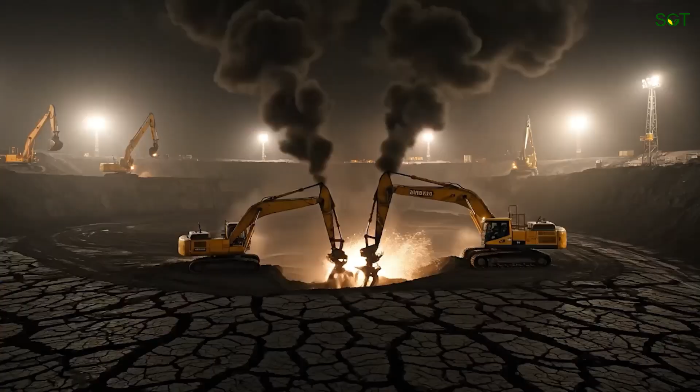What about the millions of diesel engines that are running right now? I'm talking about the trucks moving your Amazon packages, the buses carrying people to work, the machines mining raw materials, the ships moving global trade, the diesel generators keeping hospitals, data centers, factories running. These engines are not optional. They are the backbone of our economy. And the uncomfortable truth is, you can't just snap your fingers and replace them.

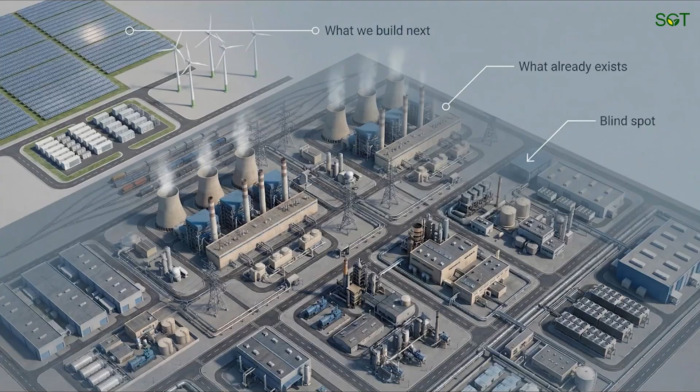That's why I often say this line, and I say it very deliberately: the energy transition will fail if it ignores what already exists. Because climate action is not only about what we build next, it's also about what we do with the massive infrastructure that's already here. And this is where the blind spot is.

While we are all looking at the horizon, dreaming about the future, the engines that actually power the global economy are running today, every hour, every minute. Logistics, construction, mining, marine, backup power. These are assets designed to last 20, 30, sometimes 40 years. They are expensive. They are deeply embedded into how the world works. So replacement is not realistic in the short or medium term.

For a long time, the industry tried to clean these engines. And the intent was right. The focus was on local air pollution, smoke, soot, particulates that affect human health. Regulators stepped in and companies installed advanced after-treatment systems, DPFs, SCRs, scrubbers. On paper, it looked like progress.

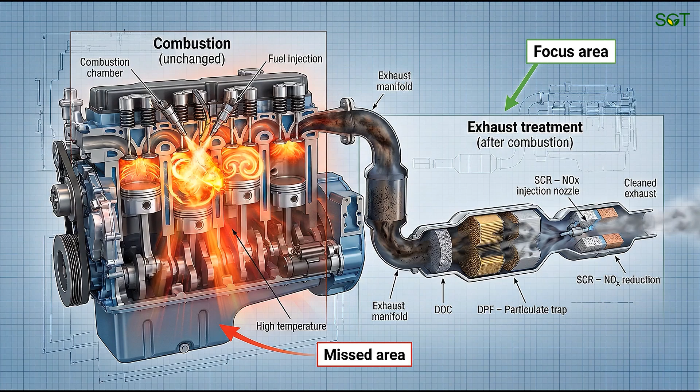But here's where things get interesting and honestly troubling. By focusing only on what comes out of the exhaust, we missed what was happening inside the system. These systems clean the exhaust after combustion, but they don't fix the combustion itself. And that created a hidden climate penalty.

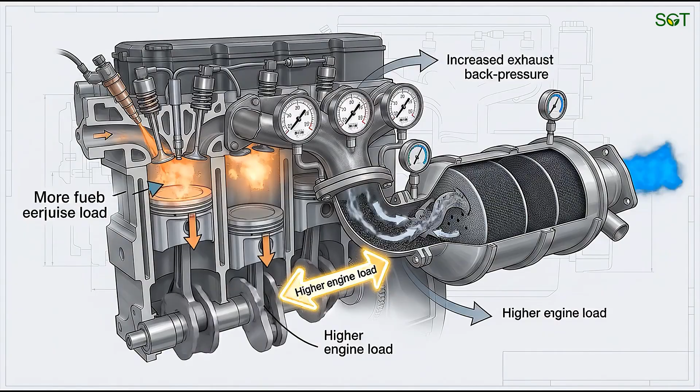First, these systems increase exhaust back pressure. The engine has to work harder. That means more fuel burned. Second, they periodically regenerate, basically burning off collected soot. That again consumes fuel.

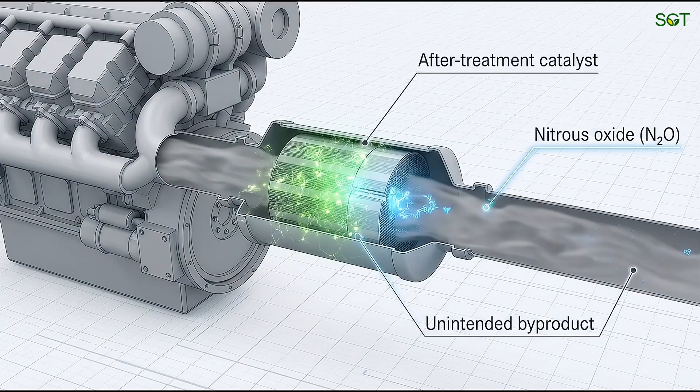And third, and this is the part most people don't talk about, they can produce nitrous oxide, N2O. Now, N2O is not NOx, it's a greenhouse gas, and its global warming potential is about 273 times that of CO2. So when you add everything up, extra fuel burn, regeneration cycles, and N2O, the total climate impact can actually increase. In some real-world cases, when you calculate it properly, the net CO2 equivalent impact can be up to 20 to 22% higher than what anyone accounted for.

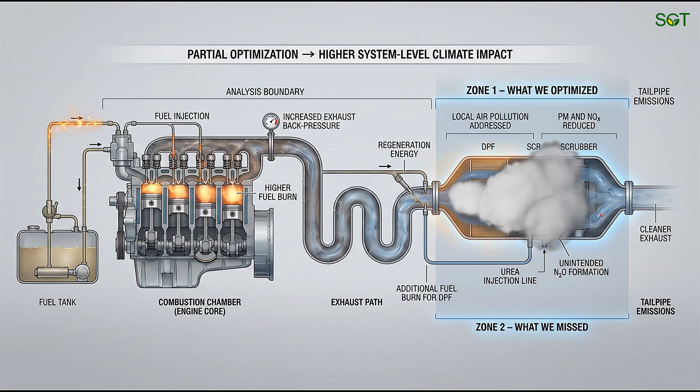That's not a small rounding error. That's a massive problem hiding in plain sight. And to be very clear, this wasn't bad intention. Cleaning air pollution was absolutely necessary. The problem was an engineering gap. We solve one problem in isolation without looking at the full system, from fuel tank to tailpipe. And when the problem is an engineering gap, the solution is better engineering.

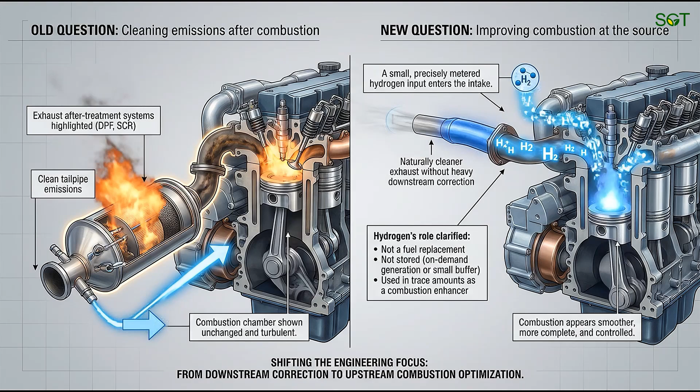That's where we at SGT decided to flip the question. For decades, the industry asked, how do we clean emissions better? We asked something else: why accept a bad, messy burn in the first place? Instead of downstream correction, we focused on upstream prevention. Instead of cleaning emissions after combustion, we asked, can we improve the combustion itself?

That question changed everything. At SGT, we spent years experimenting, testing, failing, learning, first in labs, then on real trucks, buses, generators, marine engines. What we learned was this: hydrogen, when used carefully and precisely, can dramatically improve diesel combustion. Not as a fuel replacement, not stored, not dangerous, but as a combustion enhancer.

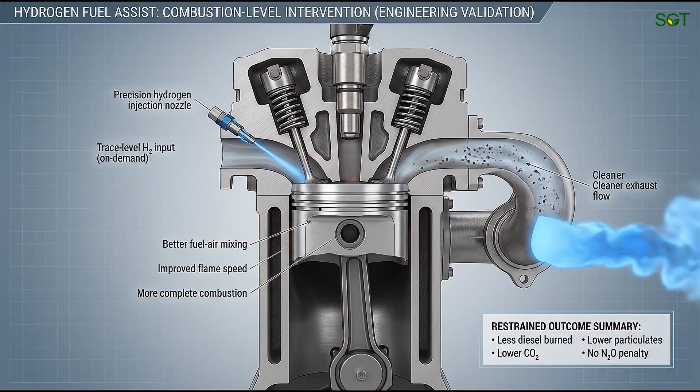Our hydrogen fuel assist technology introduces on-demand controlled hydrogen inside the engine. This improves flame speed, fuel-air mixing, and combustion completeness. The result? Less diesel burned, cleaner combustion, lower particulates, lower CO2, and critically, no N2O penalty. We're not masking emissions, we're preventing them.

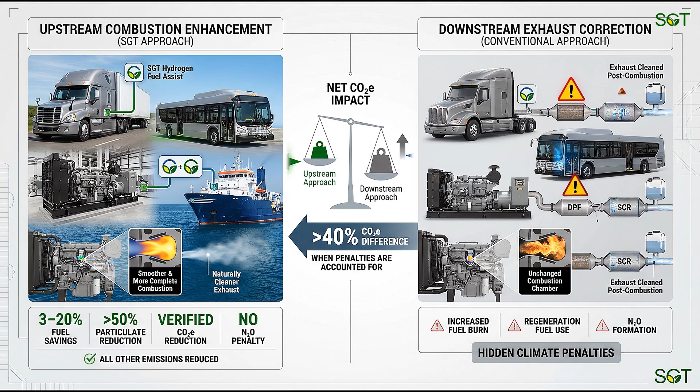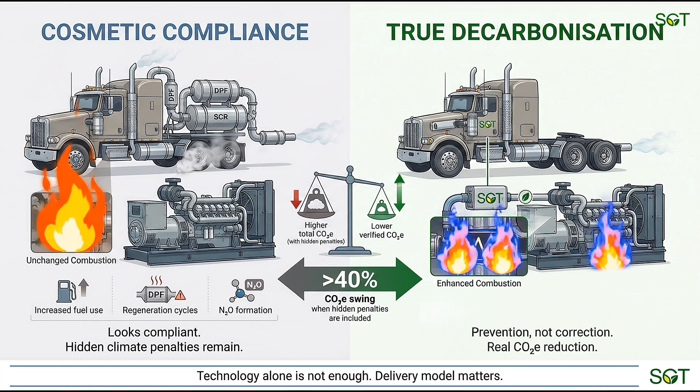Across real-world deployments on trucks, buses, generators, marine engines, we see 3 to 20% fuel savings, over 50% particulate reduction, and a real verifiable CO2 equivalent reduction. All other emissions see a significant drop. And when you compare this upstream approach with conventional downstream systems, the difference is stark. When you account for hidden penalties, the CO2 equivalent swing can be over 40%. That's the difference between cosmetic compliance and true decarbonization.

Now, technology alone is not enough. We realized very early that even the best technology fails if it's delivered the wrong way. That's why SGT is not a hardware or a software company. We are a sustainability infrastructure company.

Our infrastructure is delivered through 3 integrated pillars. Green Mentor, our consulting ecosystem that assesses assets, designs decarbonization pathways, and enables rapid practical adoption, and in future, linking the benefits with carbon credits. Green Labs, our engineering and innovation arm responsible for R&D, manufacturing, and deployment of proprietary decarbonization solutions. Green Vision, our IoT-driven data and analytics platform that continuously monitors performance, verifies emission reduction, and provides audit-ready reporting.

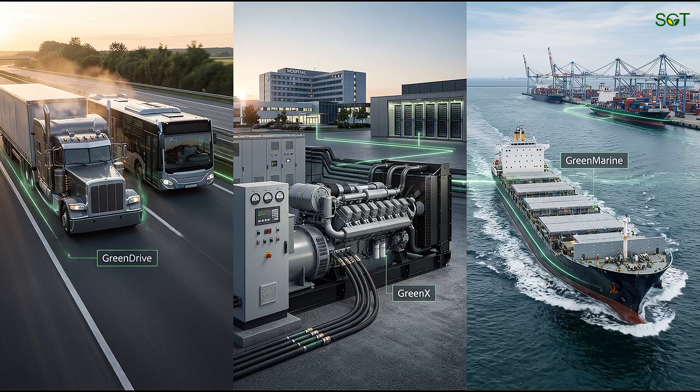These 3 elements work together like perfectly aligned gears in motion. Together, these pillars convert sustainability intent into measurable, scalable, and defensible climate impact. Green Labs delivers our industry-specific decarbonization solutions: Green Drive for engines on wheels, Green X for diesel generators, and Green Marine for marine applications.

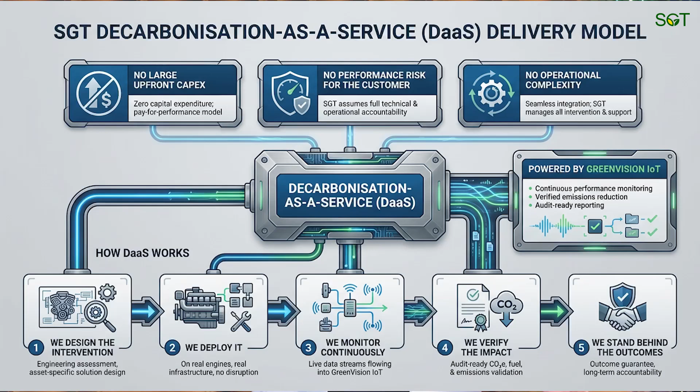All solutions are deployed through our decarbonization as a service, DaaS. Customer benefits with no large upfront capex, no performance risk on the customer, no complexity. We design the intervention, we deploy it, we monitor it continuously using our Green Vision IoT platform. We verify the impact, we stand behind the outcomes. Customers don't buy a box, they consume verified emission reduction, often at a cost lower than the fuel they save, making sustainability a profitable outcome.

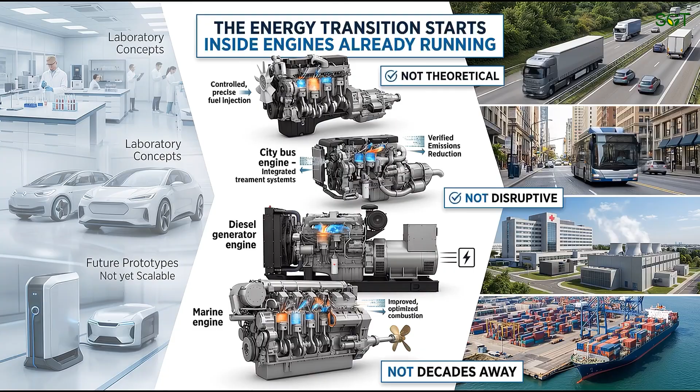That's how decarbonization scales. And that brings me to the bigger picture. The energy transition doesn't start in a lab. It doesn't start with future vehicles alone. It starts inside the engines already running. At SGT, our job is to make that journey honest, real, and manageable. Not theoretical, not disruptive, not decades away. Now.